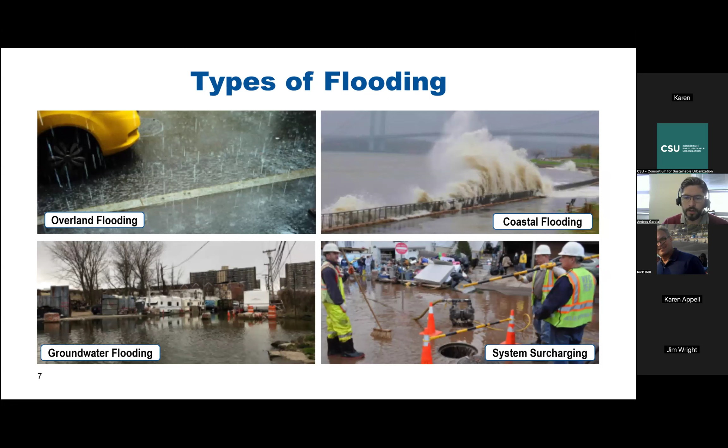Next slide. So these are the four types of flooding that can be expected to take place right after one of these massive cloudburst events: overland flooding, coastal flooding, groundwater flooding, and system surcharging. These are the four main types of flooding you can anticipate from these heavy rain events.

And in this next slide, you can see what we're really focusing on as part of our Cloudburst initiative, and I'll get into what types of infrastructure we're implementing for managing these Cloudburst events. But in general, for the Cloudburst Hub and the Cloudburst program that DEP is leading, we're focused on the overland flooding.

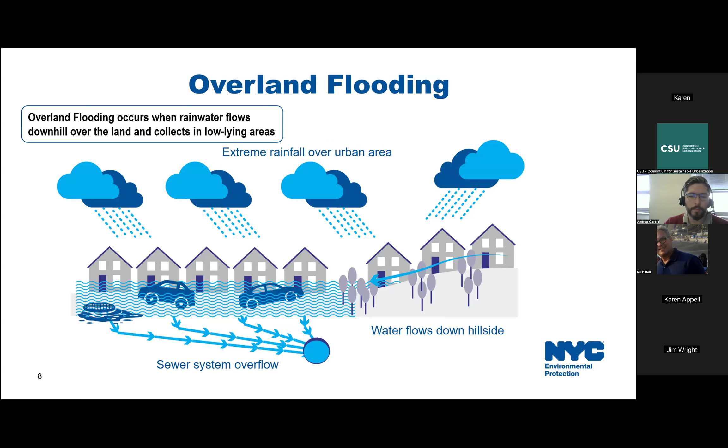As we can see from this graphic, you can read it from right to left. At the higher elevation ground, some of these homes are lucky enough to be in higher elevations, and a lot of the water will bypass them going downhill towards the lower lying areas. And here you can see, in a rather friendly illustration, the severe impacts you can expect from these strong storm events: flooded properties, flooded cars, surcharged systems, things of that nature. Next slide.

So now that we know what cloudburst is, we know it is a rain, very intense, during a short duration. How do we manage it, right? So during these strong, heavy rain events, we want to try to manage the cloudburst by reducing the strain in the sewer system as well. One way to approach the management of cloudburst, right? We also have a combination of gray infrastructure as well as green infrastructure, right?

And I'll get into that a little bit as to how that overlap really evolved from where the green infrastructure program here that I've been a part of at DEP for the last 10 years has really evolved into these measures to be able to handle these more severe storm events. And it also helps build stormwater resiliency throughout the city, right?

So of course we're planning and designing for these heavy, intense rain events, but that also means that we're able to implement this infrastructure, which is also going to provide stormwater resiliency for less severe storms than the cloudburst storm event. And wherever possible, where any of these cloudburst hubs are within a combined sewer service area, we will also be providing some combined sewer overflow reduction benefits. Next slide.

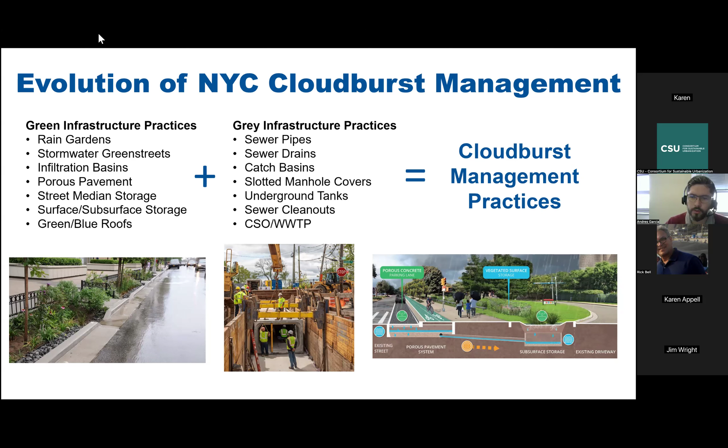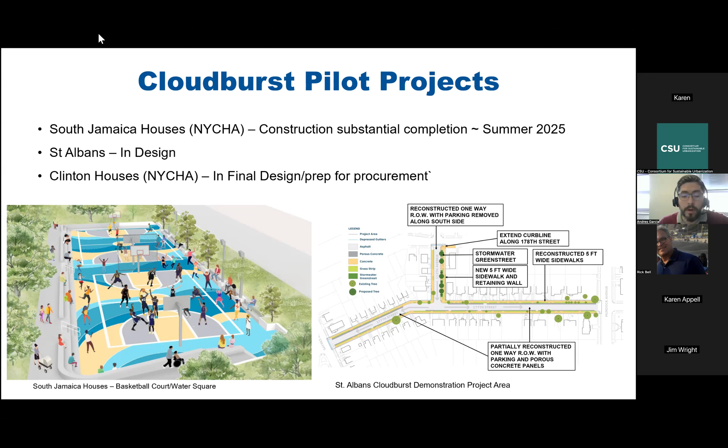And last but not least, we have Clinton Houses, which is another NYCDEP collaboration with Housing Authority. That's another one of the ones under my umbrella, and that one is in final design and in prep for procurement. So it really has reached final design at this point, and we're ready to go into procurement for that project and all the steps necessary to do that.

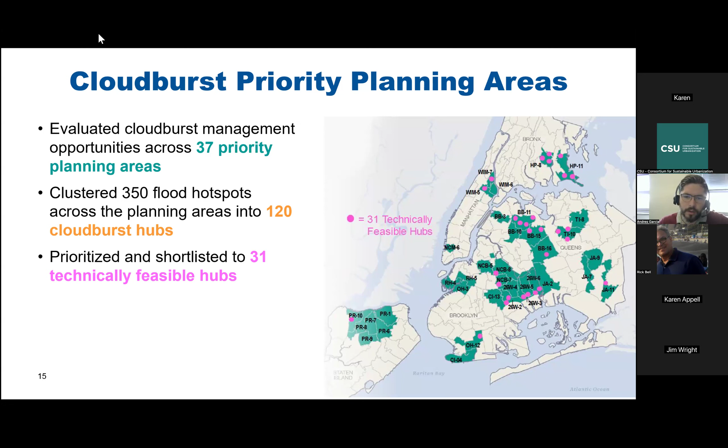Now, as far as the Cloudburst priority planning areas themselves, 37 priority planning areas were evaluated for Cloudburst management opportunities. As part of this analysis, 350 flood hotspots were identified, clustered across these planning areas. And they were grouped together into what we called Cloudburst hubs. There's 120 Cloudburst hubs, out of which 31 have been considered technically feasible. I'll get a little bit into in the next slide how we got to that technical feasibility. But in general, those are the 31 areas of focus where we're looking to implement and prioritize this work.

So once again, relating back to one of those first slides that showcases our partnerships and how many connections and collaborations we have with the other agencies. We tried to identify as part of the planning process any potential or planned projects coming down the pipeline that we may be able to synergize with in terms of similar timeline for implementation, right? So we want to take advantage of, if we're putting porous pavement in a main arterial road, for example, and New York City DOT is looking to expand upon or build upon that roadway, trying to modernize it or make it better in any way.

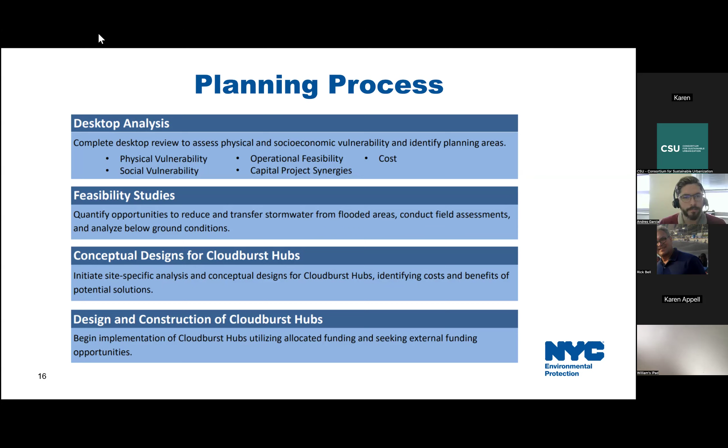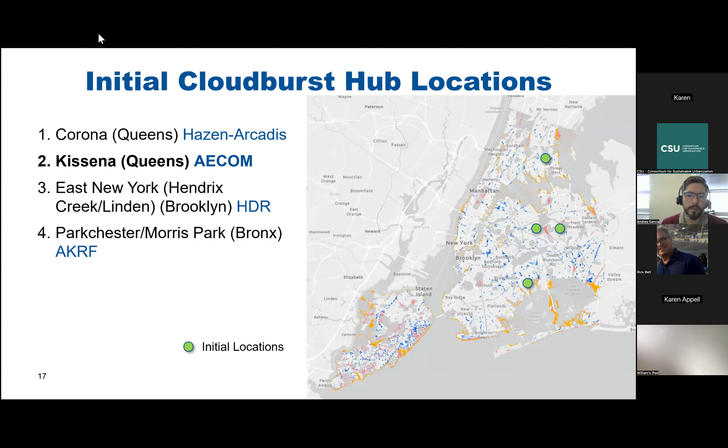And so advancing the New York City Cloudburst program, what did that mean? It was really DEP's commitment to advancing innovative solutions for Cloudburst management as part of the mayor's New Normal report, which was issued in November 2021. So the city has committed funding to initiating these Cloudburst mitigation projects in these 4 neighborhoods, while still pursuing any opportunities for additional funding.

And now we'll get into the Cloudburst feasibility study. So starting with geotechnical and survey data, right? We want to know what the conditions look like, as I mentioned before, as part of the planning process. What are the conditions in the ground? What are we actually looking at in terms of topography, in terms of soil composition and soil properties?

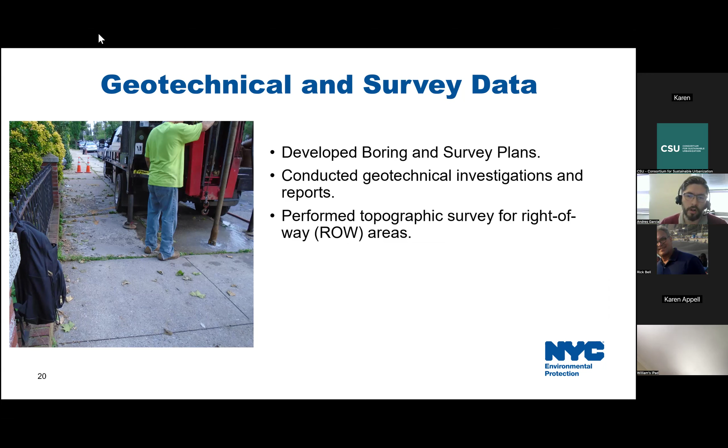So as part of the front end, we had one of our other consulting firms develop boring and survey plans, and then in collaboration with the New York City Department of Design and Construction, thanks to their great efforts, they've helped us implement the actual work of these plans. So they've done the geotechnical investigations for us, and they've done the survey and topography field work to provide to our Cloudburst Hub consultants. Next slide.

So Cloudburst model development, I'm not going to get into this too much, as this preceded my involvement with the program, and so I'm not very well versed in the actual model development itself. But what I can say is how we got to where we're at right now, what we're able to use for our implementation of the design work in these 4 hubs and our pilot projects as well. So starting with a 1D hydrologic model, which was created as part of DEP's LTCP, the long-term control plan.

Then we went from there to a 2D hydraulic model, which depicted the surface flooding from the sewer network. And from there, we moved on to a rain-on-mesh modeling approach, which creates, as I see it, a more high definition, more refined understanding of what the surface actually looks like. When the rain is moving across the landscape, how is it behaving? Where is it accumulating, etc. Next slide.

So now we understood the program, where it started, things like that, right? And I mentioned earlier on, it's an intense, short duration rain event, but what is the actual design storm event? I'm sure some of the folks on the call are more interested in the actual specifics, right? So for you guys, it would be this. Cloudburst project addresses a 2.3 inches in an hour design storm event. So that's the duration and intensity of storm that we're solving for as part of our program here.

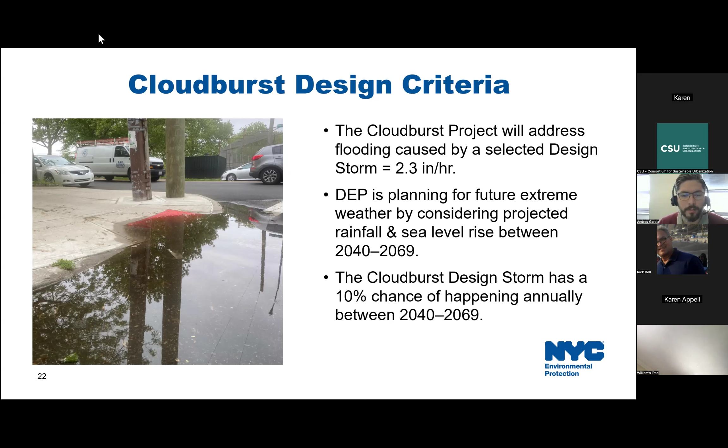And it is really DEP's planning for future extreme weather by considering this projected rainfall and sea level rise between 2040 and 2069. So within those 29 years, that's where we're expecting that 2.3 inch storm event that we're solving for. And statistically speaking, this has supposedly a 10% chance of happening annually between 2040 and 2069. As I'm sure many of you understand, it tends to happen sometimes more than that, sometimes less. But that's the design criteria we're solving for.

And then there's the Cloudburst strategies themselves, right? So this just kind of showcases the three main approaches to the infrastructure that we're implementing. So as I mentioned before, with implementation of our green infrastructure and what we've learned with our green infrastructure standardized designs, that's really the absorption component, right? Then we also have the storage component. So that's usually like tanks and subsurface storage, things like that.

And there's also transfer, right? So the conveyance aspect of this kind of semi-decentralized sewer network, which is really what this Cloudburst initiative is developing. And that is by use of typical infrastructure, catch basins, drains, pipes, and things like that. Next slide. And with this, I'll hand it off to Karen, who will explain the Kissena Cloudburst Hub project area.

Sorry, I was trying to unmute. Can you all hear me? Yeah, clear. Okay, great. Thank you.

So I'm going to talk about the specifics for the Kissena Cloudburst Hub project area. So it's quite interesting. The area itself has a very large drainage area for the combined sewer system. So under Kissena Corridor Park, which is the center of the project area, there's trunk sewer mains, and these mains handle stormwater from a massive drainage area, which is 20% of Queens. So under our project area site, there is a CSO that's draining out towards Flushing Bay that manages much more stormwater than the actual project area, and it really does represent a part of the issues of why this area is so susceptible to flooding from these cloudburst events.

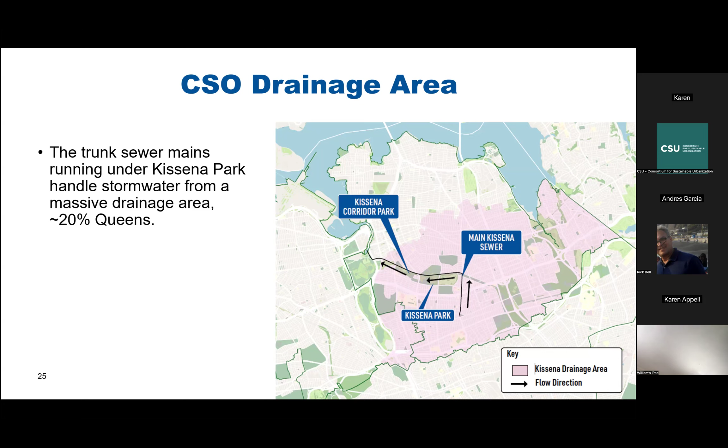So here's the existing project area. It's 845 acres. It consists mostly of residential with some light commercial development or buildings. And then there is a park that runs right through the center, and it's Kissena Park and then Kissena Corridor Park. There's actually two different pieces. So we are looking at working in the right-of-way areas and then a small portion of the park, which I will show you in a minute.

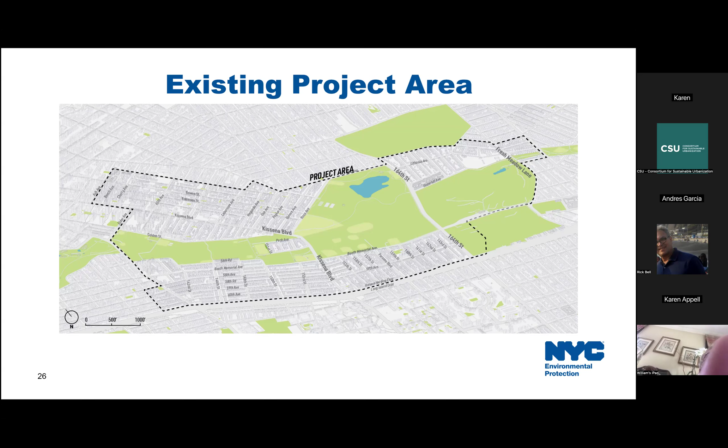So what is this project area like? Here's the topography. So regionally, this project is in a low point, both from historical topography, but also when the LIE was built, some of the fill from the LIE was placed in this project area. So the Kissena Corridor Park and the park itself are also low in the micro topography of the location. So again, with that CSO trunk main running through, it gets a double whammy from a large drainage area underneath, and then the actual low points within the topography.

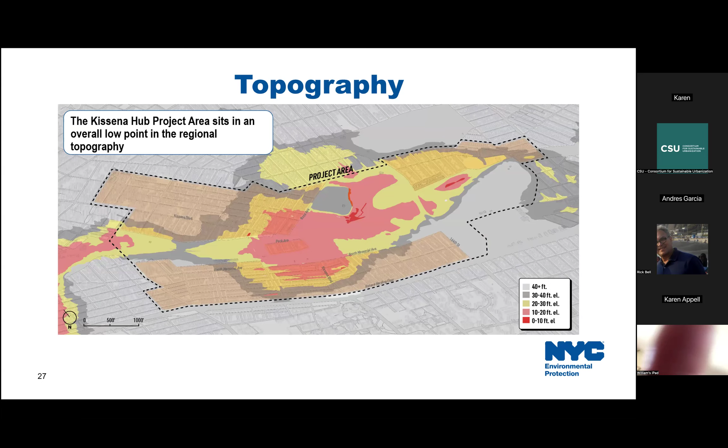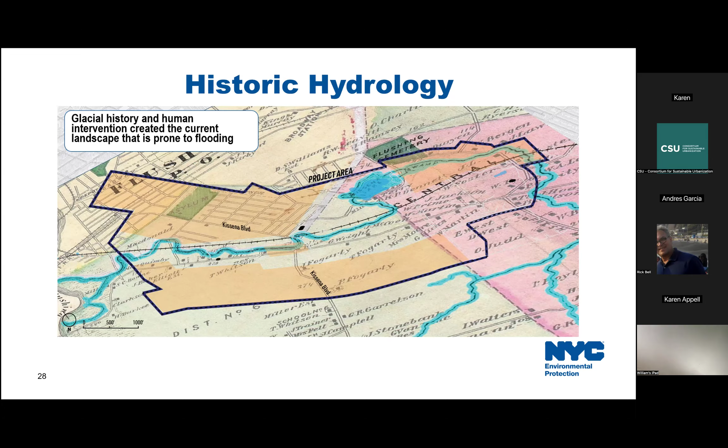So another reason why the project area is getting hit with flooding is because of the historic hydrology. We overlaid the project area on a historic map, and you can see the historic Flushing Creek running right through the project area. And as you know, where water once flows, it wants to continue to go. So there's this natural flow path for stormwater right through the project area as well. So that's the project area itself.

Now let's get into the design. So here's the project timeline just to share with you. As Andres talked about, the feasibility for this specific Cloudburst hub was completed in late 2023. And then that's when AECOM was able to start working on the design for the project in early 2024. And we expect to be completed by the end of the year. And it'll take a year for procurement, and then construction is estimated to begin in 2026 and be completed by early 2028.

And an important thing is community engagement that's been happening throughout. It happened before AECOM came on. It's still happening. We've had 3 of 5 community meetings that are scheduled for the design piece. And it's been a very spirited group that we're working with who really care about their community and the flooding issues that are occurring and that they've been living through.

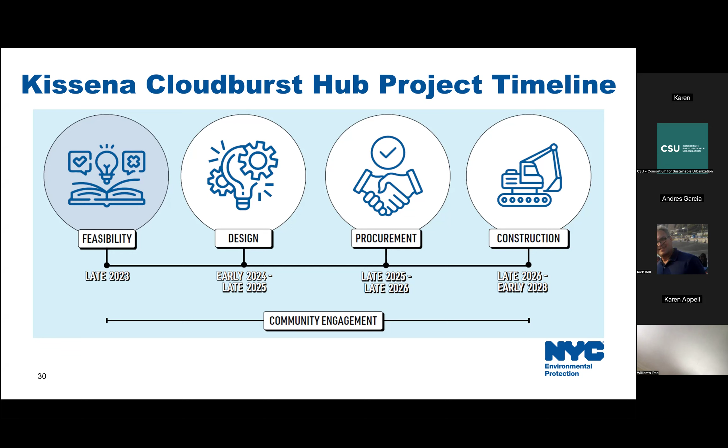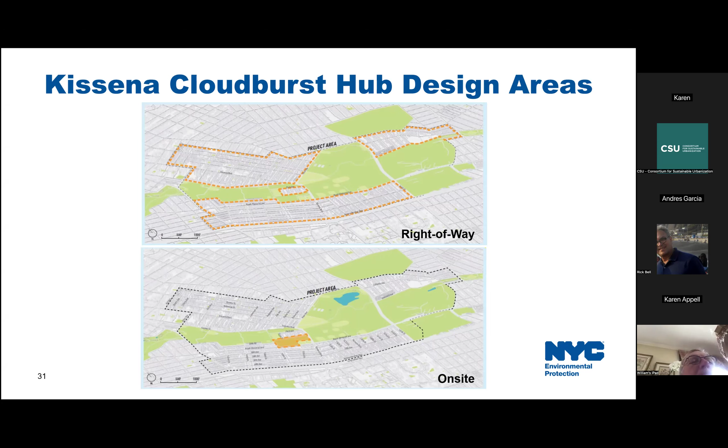We lost you for a second there, Karen. I think I accidentally got muted. Hold on, let me just. So there, can you hear me now? Yeah. Okay, great.

So you can see that there's other park areas that we're abutting against. And so we really have to coordinate with the Parks Department, DOT, the local community about the things we're doing in this on-site area. So what we're looking at right now are flood mitigation measures, some subsurface drainage storage in the park.

And then, if we're going to be modifying the park, we're looking to bring park improvements and additional public amenities in. And that's part of the community engagement we've been doing, and also a lot of the coordination we've been doing with Parks.

As Andres mentioned before, there's opportunities throughout the on-site and right-of-way areas to improve the community. You're in there doing the work. You might as well take the opportunity to improve the public amenities, improve the right-of-way areas, and add some things to these communities besides the flood mitigation infrastructure.

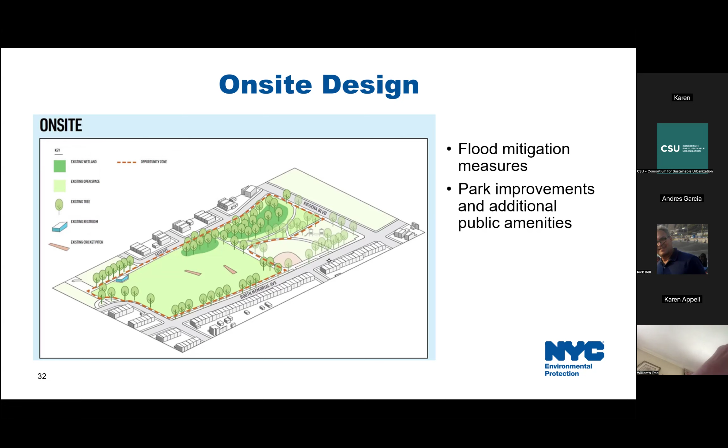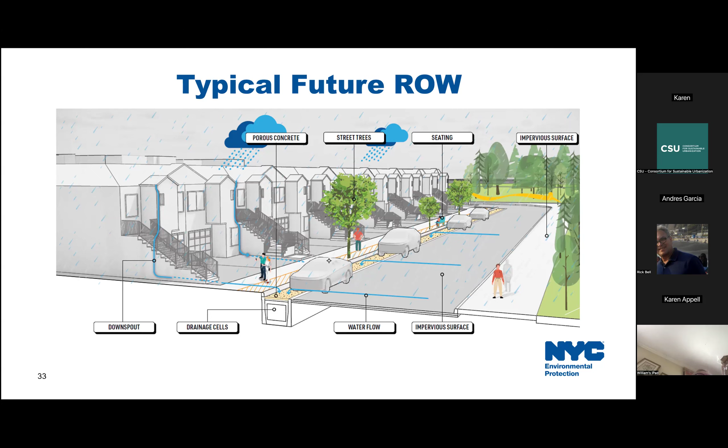So the absorb that Andres was talking about, it's absorbed into the porous concrete in this case. It is stored in the drainage cells. They do provide some bit of storage, and then it transfers the water back to the existing sewer system. And there's a couple different ways that this can be connected to the system. So here's an example that DEP used.

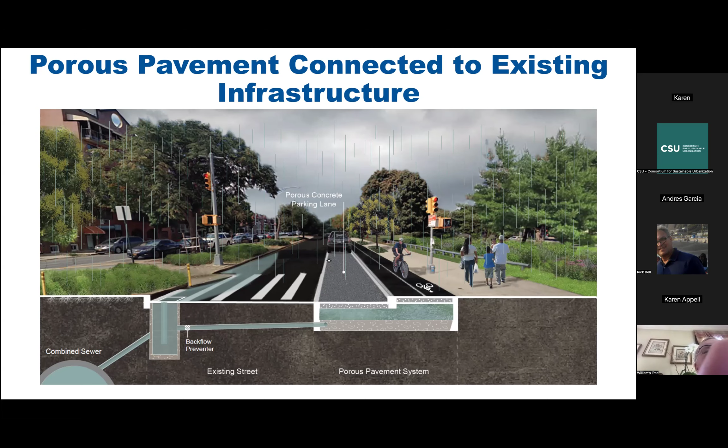And so the final thing I wanted to talk about is community engagement. So each hub has a robust community engagement program. We're all following the same Cloudburst engagement goals that were established by DEP, where there's an informing phase, there's a listening phase in our community engagement events,

and then there's a participation phase as well, where we take what we've heard from the community when we've listened. They understand more about what's going on with the Cloudburst program, and then we take their input through the design process. And this is input that happens both in design meetings.

We're meeting at open house design meetings that we have in the communities. We're meeting with community groups. We're passing out flyers and getting feedback through tabling events in the park and other areas around the hub.

And for DEP it's really important to establish these relationships with the communities so that they're getting the information they need, they feel heard, and they can ask all the questions of DEP and their partners: what's going on in my neighborhood, how are you helping me, do you know what's happened in the storm? And they really feel like a part of the process, which is part of the goal of this program.